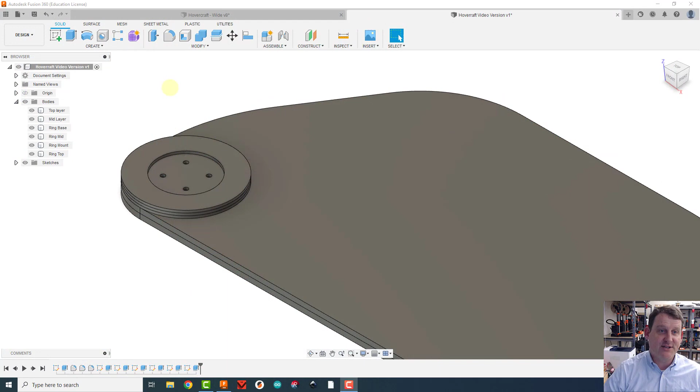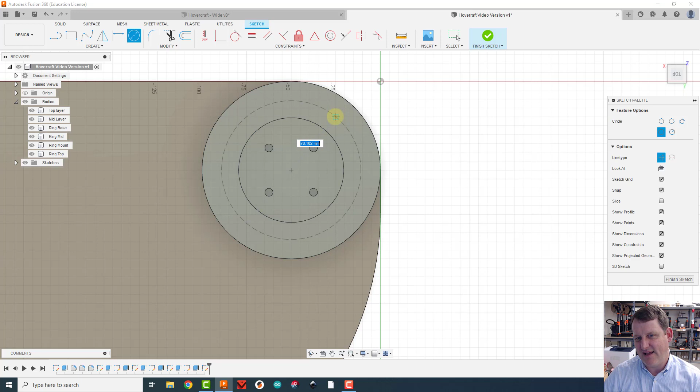So I'm going to create a sketch on this top surface right here, and I'm going to draw a circle. Well, maybe not. Yeah, I'm going to draw a circle. I'm going to draw a construction circle. I'm going to find the center of the overall circle and draw it out. And I want to put it kind of like a little bit over the middle. So kind of there, I'm just going to put it down for now.

And I'm going to use my dimensioning tool. I want to make sure that the distance between these two circles right in here, I don't want my screws to get too far to the edge. So I'm going to grab a screw that I'm using, and I'm just going to measure the top head of it like this, and that ends up being right around 8 millimeters. So I'm going to keep this maybe 8 millimeters from the edge.

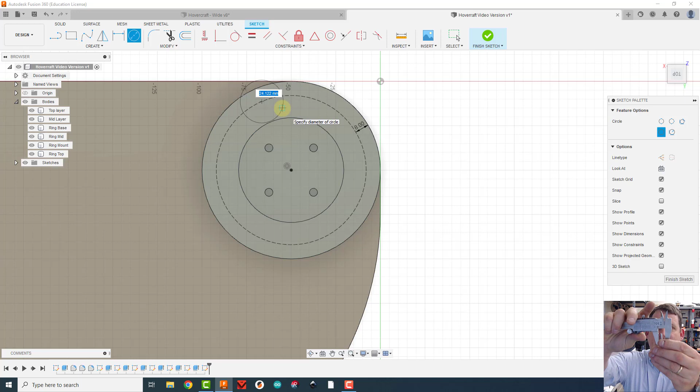So my holes are going to go along this dashed line now. I'm going to go grab another circle tool, and I'm going to click maybe over in here-ish, turn off the construction tool, and this is going to be the actual hole that the screw goes down through. I want to make sure the hole is bigger than the width of the screw. It's 4.05, so I'm going to make this hole about 4.5 millimeters, just to make it a little extra big.

So 4.5 millimeters, enter. And now what I could do is add another one over here and another one over here, or I can do a circle pattern tool. So I'm going to go to create here, go to circle pattern. The object that I'm going to pattern is this circle right here. Whoops, I have the center point, not the actual circle. So I want that blue to be the outside circle like that. Click the center point, that's the center point of my pattern that I want to do. And I had it set to 3, and that looks good. I'm going to click OK.

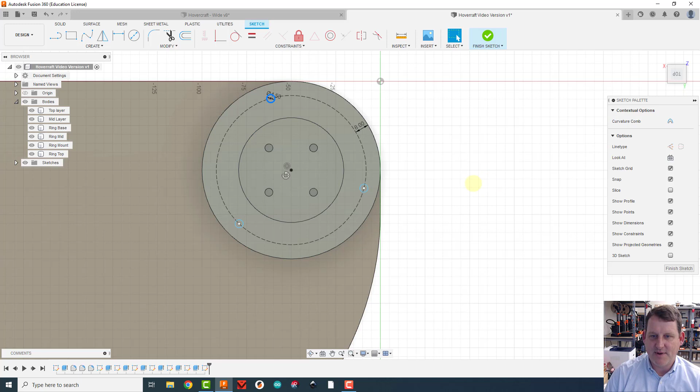So here are the 3 positions of those circles, and that looks pretty good. And I can rotate them around by grabbing my original circle and just pulling it, and you'll see how it just adjusts everything. So I think that actually, like right about there, looks pretty good to me. I'm trying to maximize how, I don't want them to be too close to this edge, so that's why I have it a little bit farther away here and a little bit farther away here.

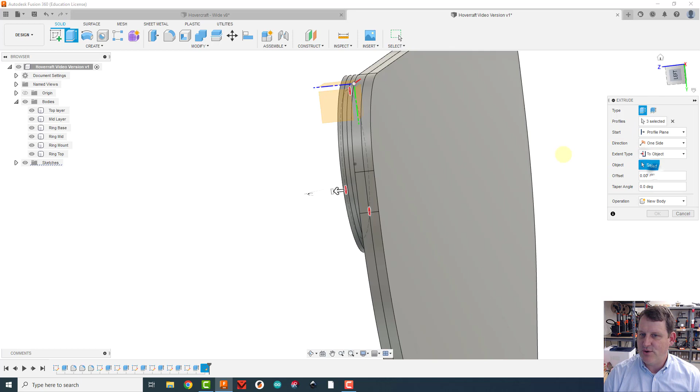All right, and I'm going to extrude these. I'm going to shoot these holes through all the layers. So I'm going to flip it over, and I'm going to say I'm going to extrude it all the way so you can see the bottom. And I'm going to say to object. I'm going to click on the bottom here, and it extrudes all the way to the bottom. Click OK. And now I've got my screw holes going all the way through.

Now what I need to do on the bottom is I need to actually cut a square hole in this first layer of plywood, this bottom layer of plywood, so that the square nut can sit inside there. And I need to grab a square nut so I can measure its dimensions. Okay, so I have the square nut now. I'm just going to measure it real quick. So the dimension here is 8.5. So I might round that up to 9 because I want to make sure that it's big enough to have the nut going. If it's too small, I have to redo everything.

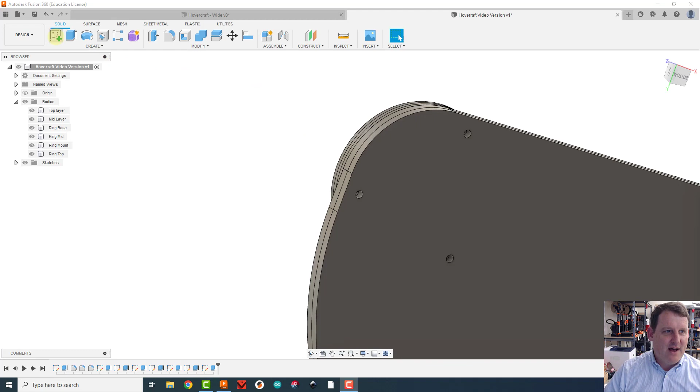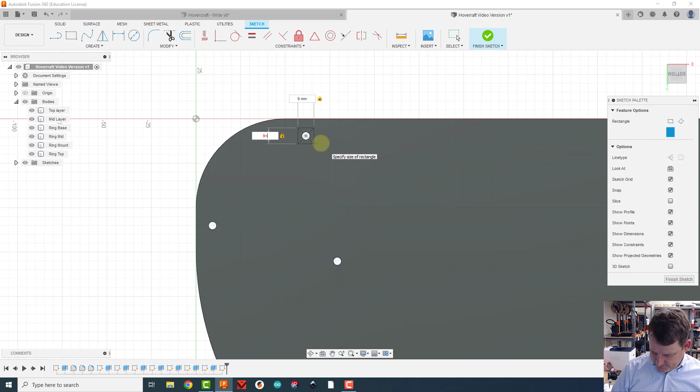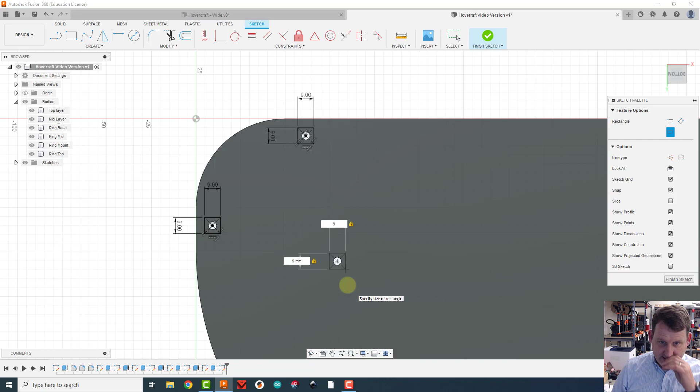So I'm going to create a sketch on the bottom surface here, and that's captured all my geometry. So I'm just going to come grab a rectangle tool. I want to use a center point rectangle because I want the center of the rectangle to be right on that circle. And I'm going to drag it out, and I'm going to do 9, tab, 9, enter. I'm going to do the same thing on all of them. So I'm going to come here, center point rectangle, go to the middle of the circle, drag out, and do 9, tab, 9, enter, and one more of them. Rectangle, center point, center of the circle, 9, tab, 9, enter. Now I need to extrude these down through one layer of the plywood.

So I'm going to tip it over a little bit, hit E for extrude. I'm going to click on all 3 of these. And I want to go, it's facing towards me as positive, so I want to go the other way, so I'm going to go negative.

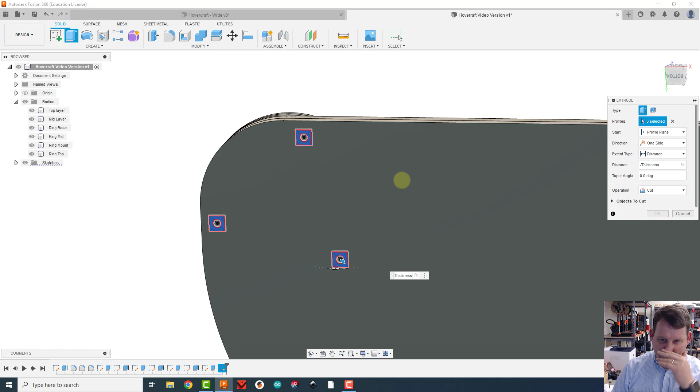And I'm going to do thickness. I don't want the thin plywood, I want that thick plywood. And then I'm going to hit enter. And now I've got my recessed little square holes that are going to hold the nuts for us. And the screws are going to come down, it's going to clamp on. This all looks fantastic.

All right, so at this point, I think we're done with the thruster mounting on this side. We need to make one on this side. So we could do that process all over again, copying all the numbers over, or we can do this cool trick, and it is called create and a mirror. And it's asking us what things we want to mirror. We have bodies selected. We can start selecting things that we want to mirror. But then it's going to ask us what the mirror plane is.

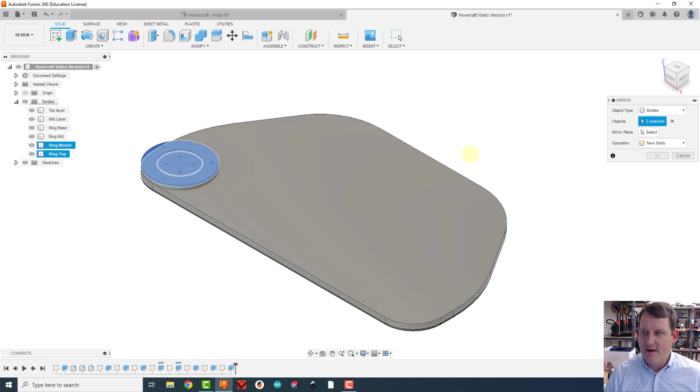And we need something, a plane right down the middle of our body so that we can have it be the mirror that we're going to mirror around. So I'm going to hit cancel here. We got to do that first. I'm going to do a construction plane. And I'm going to choose the one called mid plane.

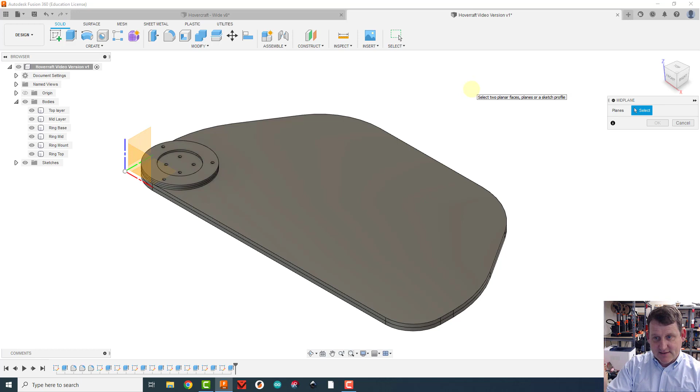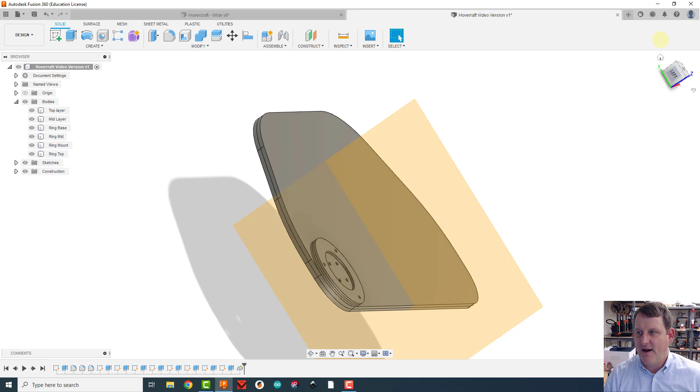And what this does is it creates a plane, a surface, in between two other things, right in the middle of them. So I want it right down the middle through here, so I need to choose one of these sides, these flat sides here. So I'm going to click on this one, and it's going to give me a plane right in between that and this flat one here. And you can see now I have a plane cutting through the middle of my hovercraft. Now I've got something I can mirror around.

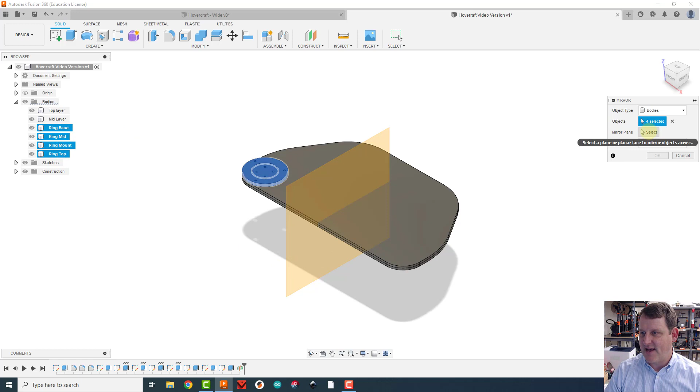All right, so here we go. Going back to create, mirror. I have it set to objects, or sorry, bodies. And then I'm going to come over here and click on all of these. I want all of my rings. So 1, 2, 3, 4 rings. And then I'm going to say mirror plane. I'm going to mirror around this. Then I'm going to say OK. And notice how it just made a whole set of ring ones that are all of the ones on the right. So pretty cool we were able to do that.

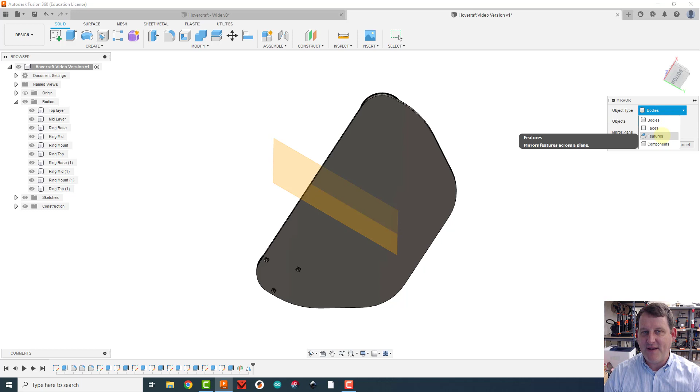That's pretty slick. But when I look at the bottom, I notice, oh, wait a second, but I didn't cut any holes for over here. And that's okay, because I can actually mirror these holes as well. So to do that, I'm going to do create, mirror again. This time, instead of mirroring an entire body, I just want to mirror a feature of a body, so just part of a body.

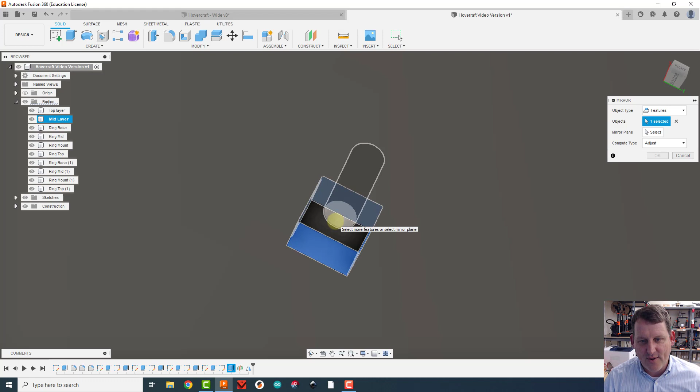And the things I want to mirror, I'm going to zoom in, and I'm going to click on, see how I got that hole, right? Whoop, well, that's too much. I'm going to unselect that real quick. I want to get, oh, and this can be hard to select. Zoom in a bunch. I want that. That's that square hole. I also want that circular hole right there. So those are the two things I want. And notice how it's already picked them up in all three of them.

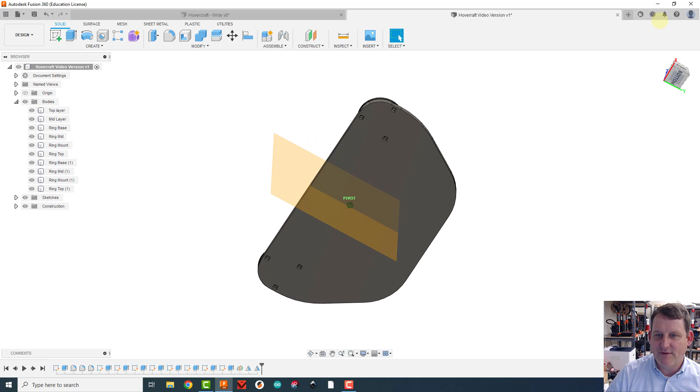And then my mirror plane that I'm going to mirror it around again is this middle thing. You can see where it's going to cut it right in there. And I'm going to say OK. Now when I flip it over, I've got those holes in exactly the right place on this side and that side. Everything is done. Now this plane here is going to be ugly and in the way a bunch, so I'm going to come here to my construction, turn that off real quick.

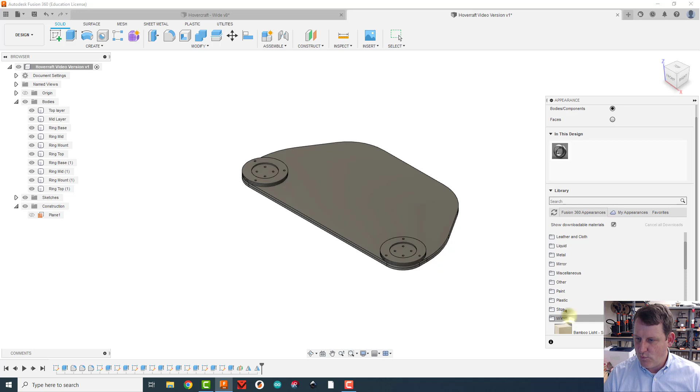Now at this point, I want to start trying to imagine what this is going to look like, and all this is going to be plywood. So I'm actually going to do A for appearance, click on the A key, and then here in the wood, I'm going to choose one of these woods, and I'm just going to drop it in on all of these layers. So mid layer, and maybe I can actually select all of these. So I'm going to click on the first one, hold down shift, click on the last one, and see if I drop it on all of them if they all change.

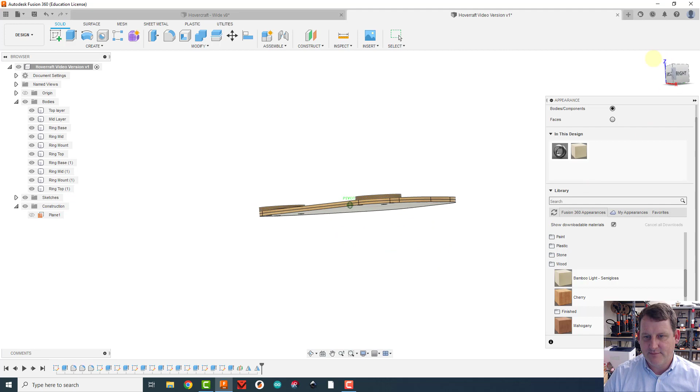Oh, that was way faster. Nice. What a technique. And now I've got all of that modeled in, and it looks like wood now. So I can start imagining what it's going to look like in real life. All right, we'll close the appearances menu.

Now we've got both of our thrusters modeled in place. We just need to attach them. And we need to do the downdraft, and then we have the third layer of plywood here, and then the skirt layer next. And we'll do that in the next video. Good job so far. Hang in there.